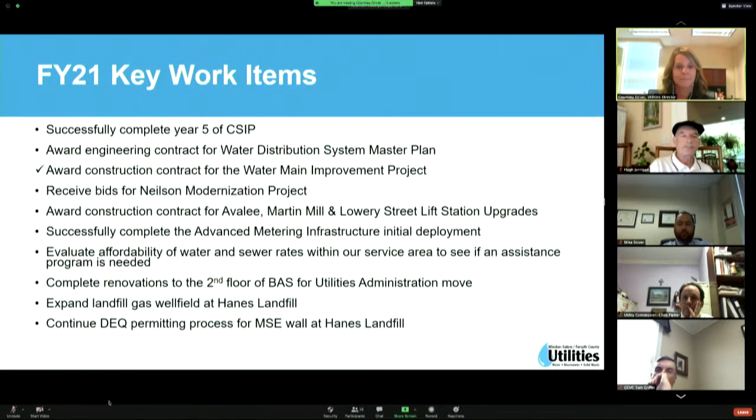With that, I am going to turn it over to Kenny. Kenny's our field operations manager, and he will go over an overview of what he does.

Good afternoon, commission members and utility staff. Utilities field operations is located at 1550 South Martin Luther King Drive. The division consists of 5 work groups: water distribution, meter services, wastewater collection and system compliance, construction services, and technical services.

This picture was taken about a year ago, maybe 14 months ago. We had an 8-inch cast iron water main that broke on Walltown. Our GIS records show this was installed around the year 1927. So this is cast iron pipe. Life expectancy in a good working system is around 80 to 100 years. So we were right around the 92 or 93 year mark.

That's pretty good. It's common to find these types of failures in our pipes just because of system age, and sometimes we impact ourselves by turning pumps on fast or shutting hydrants fast, which can weaken a pipe. But we feel really good that 90-some years out of a water main is a long time, and we can't get our own bodies to last that long. So felt pretty good about that.

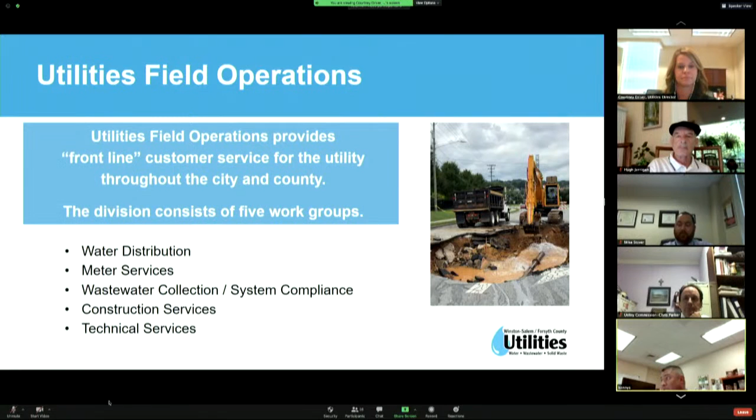The main thing to tell you is around 1955, ductile iron pipe was introduced, so somewhere along those lines we started switching over. We still have a lot of cast iron in the ground, but as a utility we're trying to get the most for our money. The next 2 slides, you'll see two main breaks. The first one is at Highway 52.

It's a 6-inch cast iron pipe. The second slide you'll see is an 8-inch ductile iron pipe that broke. Both of these broke the same week. It was a stretch of cold weather in 2015.

I was currently working at the water plant, and we had anywhere from 4.5 to almost 8 inches of ice on top of our sed basins. That's a rarity because water's always moving, but we had frozen water. The ice was really thick. We had to go out there and punch holes in it so the sludge scrapers could continue to work.

Both these pipes broke because they were underneath the bridge, aerial lines. The water usage was really low, right? It's 4 degrees, no one's washing the car, nobody's watering the lawn. We actually shut down 2 of the large arteries in Winston-Salem. So if you play those videos, you can see.

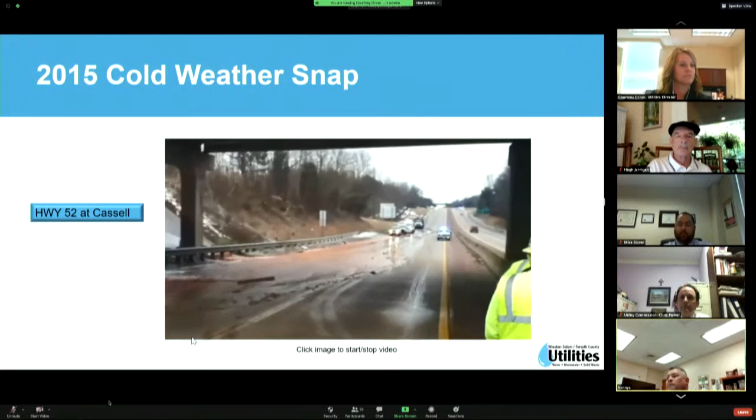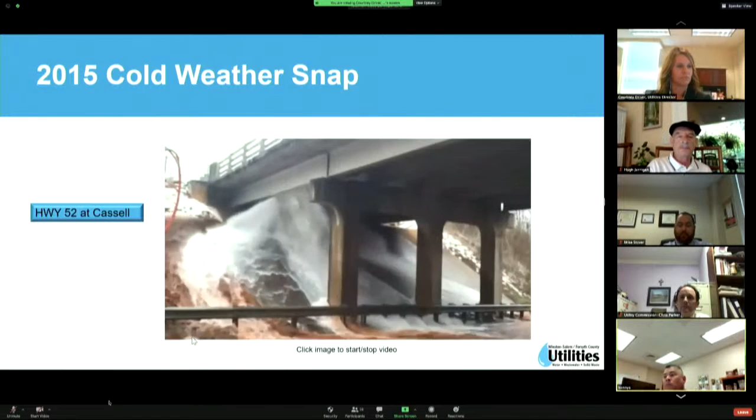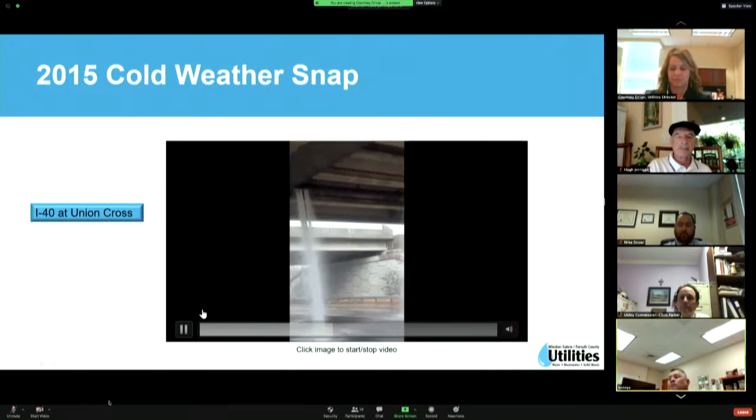The hard part about that was a lot of the roads were still icy. We were creating ice. We tried to get out there and close the water valves as quickly as possible. We did end up losing quite an amount of water, but thank goodness we were able to respond in a safe manner and get those lanes opened back up.

Our water distribution maintains about 2,324 miles of infrastructure. If you think about that from end to end, like I-40 which starts in Wilmington and ends in Barstow, California, that length is 2,560 miles. So if you stacked our water main end to end, you'd make it all the way to Needles, California. That's pretty neat to see how much infrastructure we maintain. This includes pipes, valves, water connections, and about 20,000 water hydrants or fire hydrants.

It's a lot of hydrants out there. That's probably the main thing you see from water distribution. The field operations group, we're kind of like the DOT of your water and sewer. We take care of pretty much everything you can't see with regards to hydrants. Those are pretty common to see.

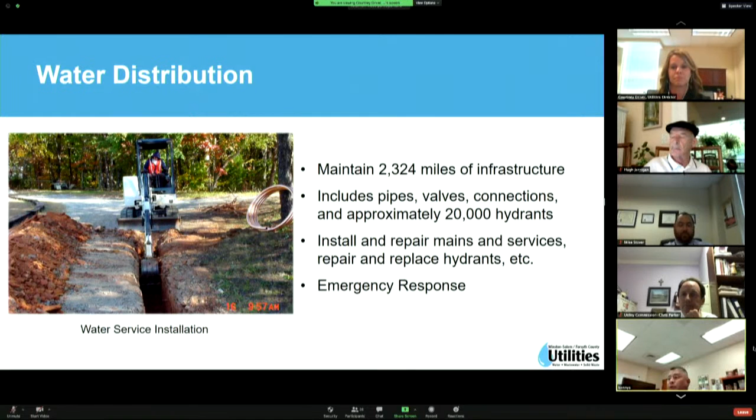We have 2 shifts, starting at 7:30, and the second shift ends at midnight. We do handle emergency response after hours. We have a duty crew responsible for handling any calls that come in from midnight to 7:30. So we do provide 24-hour emergency response.

Meter services is also housed up here. They're responsible for starting and stopping water services. They read approximately 130,000 residential, commercial, and industrial meters. Maintenance includes replacing and repairing meters ranging from 3/4 inch in size up to 10 inches. They also perform leak and usage investigations.

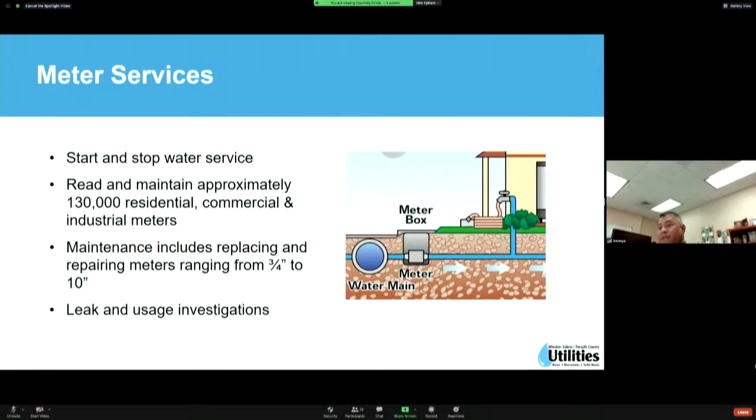Unfortunately, COVID has made a lot of people work from home, and we've noticed a large uptick in calls with customers complaining about their water bill being too high—they're not used to seeing water bills as high as they are because everyone's at home. So the meter services group spends a lot of time investigating high water usage, and most of the time it's just because people are at home and not used to seeing water consumption as high as they have. Our wastewater collection group maintains over 1,800 miles of infrastructure.

So combined with our water mains and our sewer mains, if you got on I-40 and started in Wilmington, drove out to Barstow, California, turned around and came back all the way to Little Rock, Arkansas—that's how much pipe we have to maintain. So that's quite a bit for us to look after.

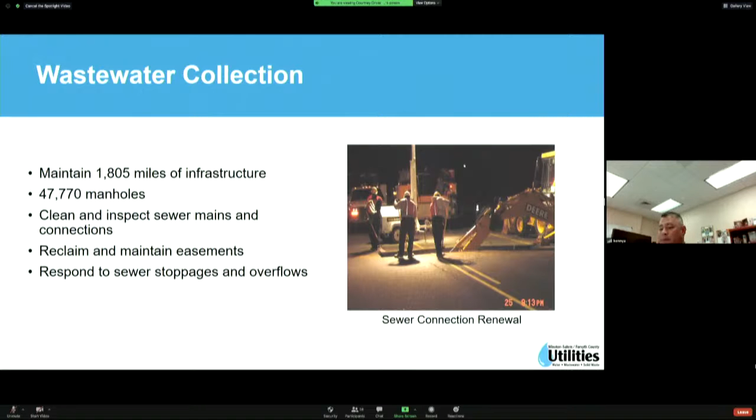The wastewater collection group also cleans and inspects sewer mains and connections. We reclaim and maintain easements. One of the biggest things we do is respond to sewer stoppages and overflows. Last year we had the lowest amount of SSOs at 74—that's the lowest since we've been tracking that. So that was a big win for us.

Gail Kettler, in coordination with Industrial Waste Control and Utilities Field Operations, put out—we launched a large campaign for no wipes in the pipes. We've also seen a large uptick in wipes in the pipes because of COVID, mainly because there was no toilet paper to be found on the shelves, so people were using these so-called flushable wipes.

Flushable wipes, if you read the package, say they're great to use—okay to use on a well-maintained system. Well, not everybody's system is well-maintained, and they'll say they're biodegradable. Well, it may be in 100 years. It doesn't take that long for a wipe to get from your house to the sewer plant, so someone's going to have to deal with those wipes—either this group or the wastewater plants. They either have to get them out by mechanically screening, but the biggest thing is there's a place for everything. A place for those wipes is in the waste basket.

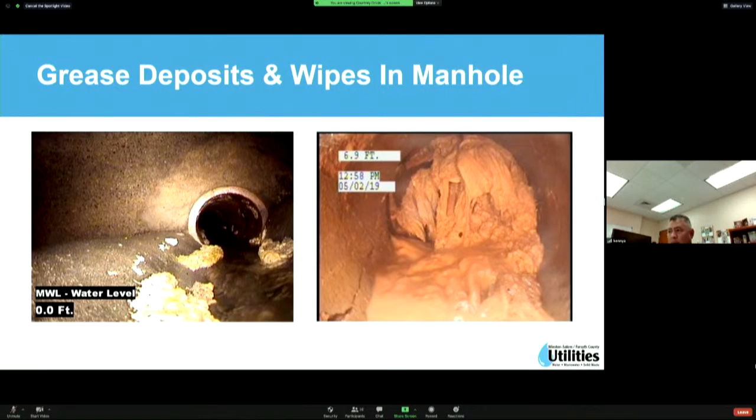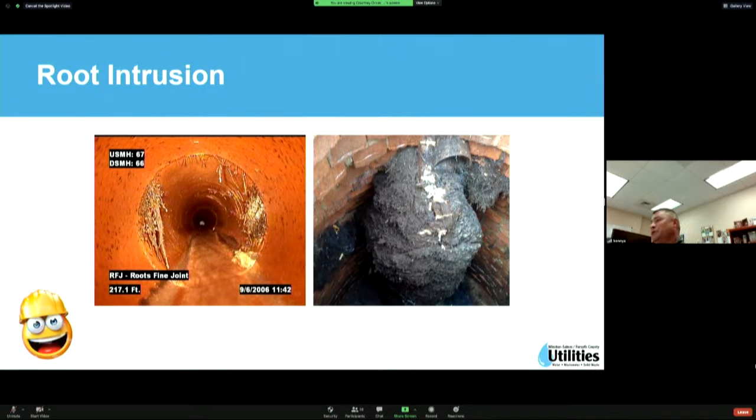So, like I said, we've got to use stick hooks and grabbers and ropes, attach them to come-alongs and hoist to remove those.

The cross-connection control falls under our distribution group. This is one of the new groups that started last fiscal year, and it's really to comply with North Carolina state statute. We have to govern and ensure that our water system, your public water supply, is safe to drink.

Kenny, Harold Day here. I talked to Courtney a couple weeks ago about KRG, our subcontractor. Do they have a permit for their trucks? Our contractors that work for us have to abide by the same rules as anyone else. Our own jet trucks that contain water are in compliance with this new rule. We had to make some modifications, but it's only fair that we do what we're telling the public to do. My question: I was watching one fill up, didn't have a meter on its hose. I guess they do a flat permit fee since they're working for us. That's correct, they pay a fee.

Where will you see the placard? Courtney, if you go back 2 slides, you'll see on the truck that blue placard. It'll say 20 on it for 2020, and in October that's when the placard was good for.

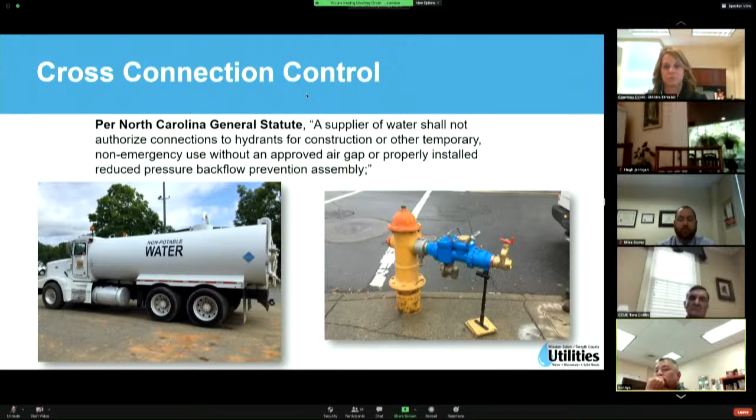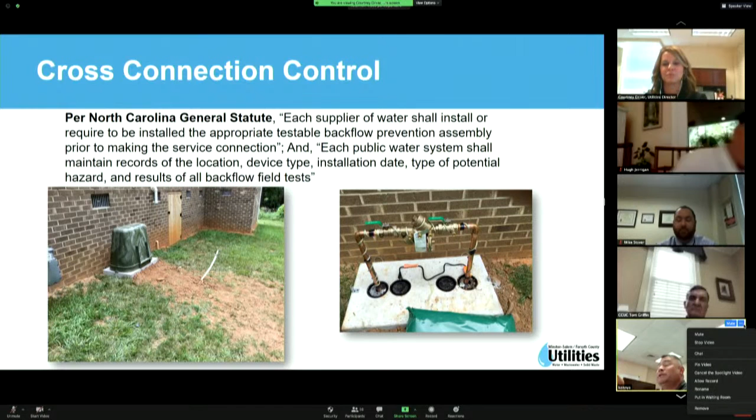We're probably the most visible group out there, probably one of the largest groups in utilities, probably the largest group in utilities. We're probably the most fun group to be around, the most exciting. When we pull up, usually we're in large trucks, something loud, something's going on. We get a lot of attention from children. I'm a child myself, I like the big equipment, but we have a big focus on losing the old image of what people call a city employee, and we're trying to change that face every day. We are the most visible, so we take the good and bad. Sometimes that draws negative attention, but we do our best.

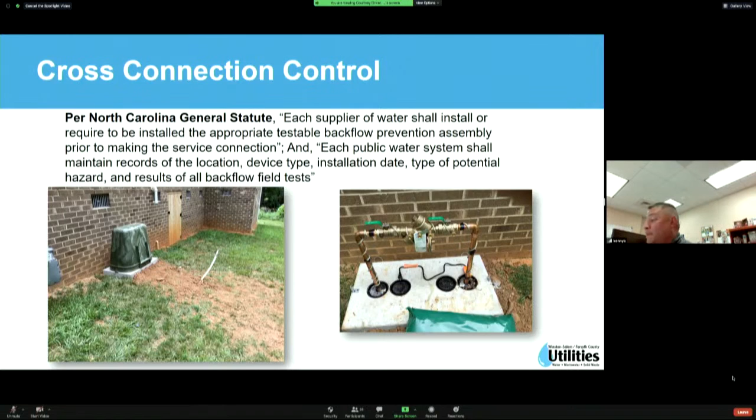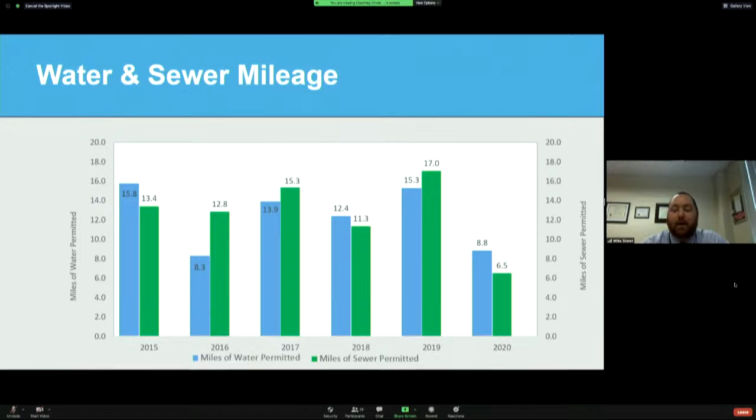So far this calendar year, our plan review team has issued 36 conveyance permits, totaling $3.424 million. This next slide shows the breakdown between water and sewer mileage. So far this calendar year, we've permitted 8.8 miles of water mains and 6.5 miles of sewer mains.

Here's our water production slide. This may look a little worse than it really is. We had very little rain in September 2019, and had an exceptional month, 42.2 MGD, million gallons per day. This month, a year later, we had a subpar month. We don't know if that's because of above average rain or a COVID impact, but we had a 5.8 million gallon per day decrease from this time last year.

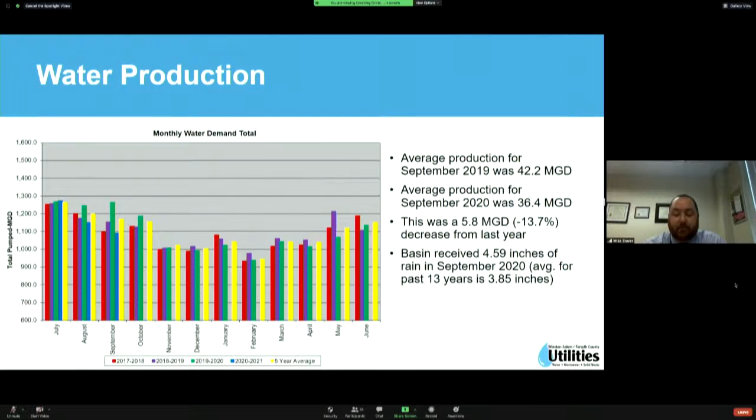Here's our fiscal year to date water production numbers. As I mentioned, last year was exceptional, and I think it bumped up the 5-year average, which we're below right now, but we're slightly below 2017, 2018, and 2019.

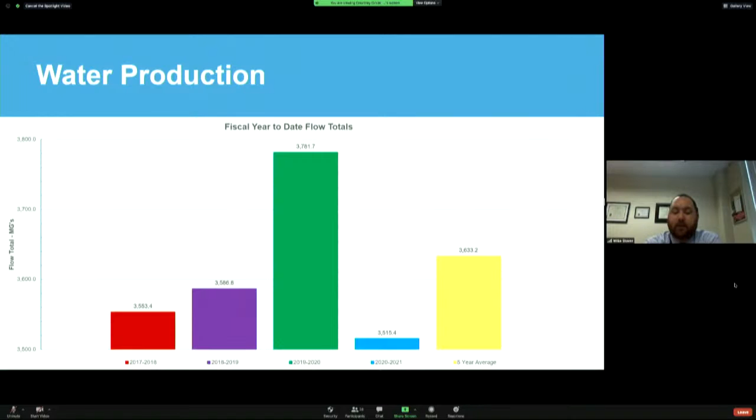Collection system update: we have not received reports from July, August, September, or October. We did receive the report for June. We had 3 notices of deficiencies, which is kind of like your outside of no further action, the lowest action the state gives you. We had 1 notice of violation and 0 intend-to-enforce SSOs.

Here's our SSO rate per 100 miles. We're still doing very well. Last year, as Kenny mentioned, we had a record year. Through the first 3 months of 2020, we were below where we were last year, so we're on pace to have an even better year. Over the winter is usually very tough, we have an uptick in SSOs. If we can get that number down, we'll do very well. Our goal this year: Kenny mentioned we had 74 SSOs last year, our internal goal this year is 65.

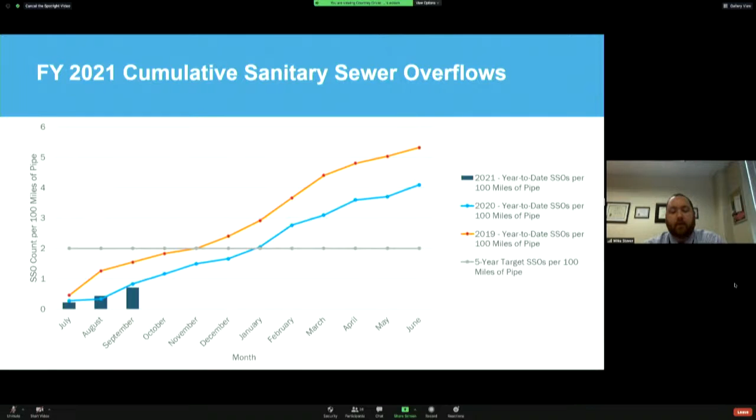Here's our SSOs by aggregated cause. We had 1 categorized as other, due to a private utility contractor who had a shallow sewer main with a trackhoe on top of it and crushed it while relocating that main, creating a sewer spill. We had 3 pipe failures and 1 related to fog, roots, and debris.

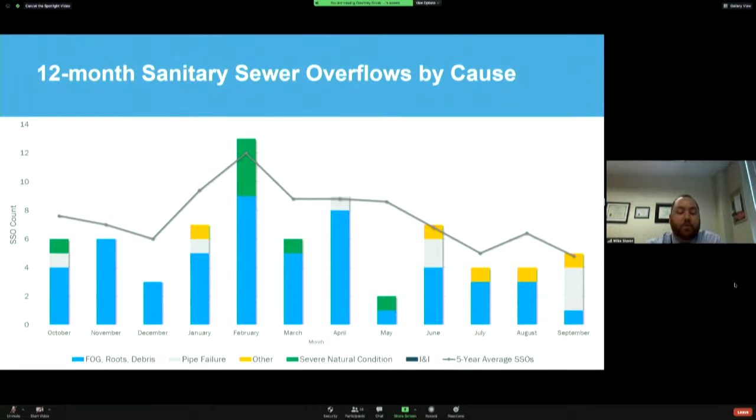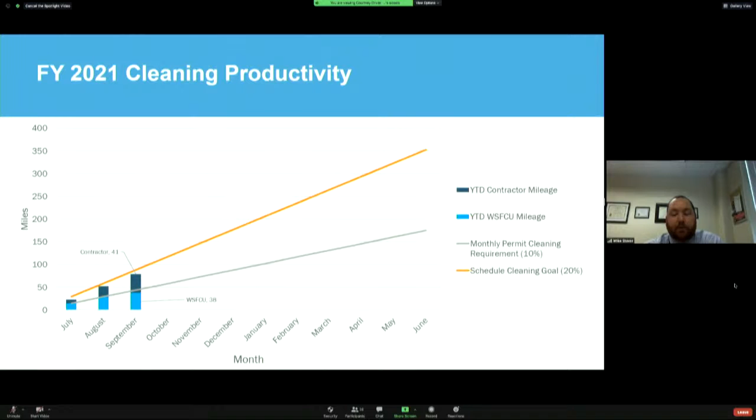Cleaning productivity: we're still well above our 10% permit requirement, slightly below our 20% scheduled cleaning goal. As I mentioned last month, we're still early in the fiscal year, and our cleaning contractors are getting into their groove. We've had some internal staffing challenges. I talked to Kenny this morning, and we've got 3 of our sewer group members leaving our department for other places, so we'll have vacancies to fill, which might hurt us in the interim.

Any questions on the water and sewer updates?

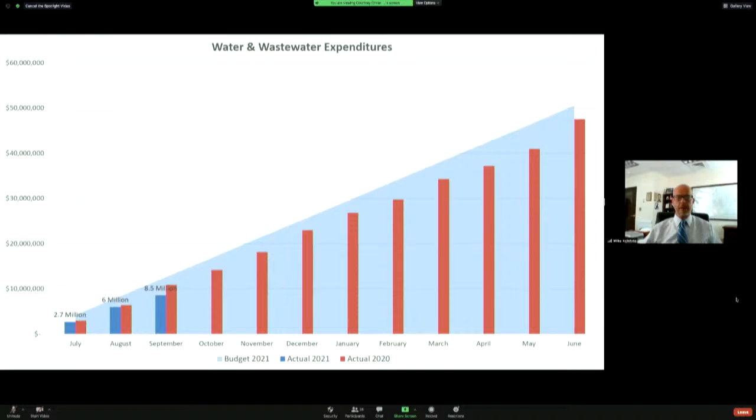On the expenditure side, the actual expenditures for the first 3 months of FY21 are slightly lower than FY20 and under the budgeted amount. So we're tracking well on both the revenue and expenditure side for the FY21 budget.

Let's move on to the revenue impacts of COVID-19. From April 1st through September 30th, we're looking at about 6 months of impact now. We've waived $2.1 million in late fees and penalties, $1.1 million of that in the current fiscal year. Just as a reminder, we did not budget to collect any late fees or penalties in the current fiscal year.

We also currently have nearly 16,000 past due accounts and a total of almost $4.5 million in past due billings, compared to just under $2 million in past due billings at the same time last year. The past due billing amount increased $900,000 from August. Our delinquency rate at the end of September was at 30% compared to 10% at this time last year.

So what we're seeing here is that these numbers are trending higher, which is, I think, to be expected. We're hopeful that our outreach to customers with delinquent accounts will reverse this trend, and we'll be closely monitoring this moving forward. Any questions on that update?

If not, I'll turn it over to Lisa Saunders for an update on the FY20 year-end financial numbers.

Okay, thank you, Courtney. Appreciate that. At Hanes Mill Road Landfill in the first quarter of the fiscal year, we took in 69,855 tons. So we're ahead of the budget by a couple thousand tons and behind where we were last year. And in the month of September, we took in 22,843 tons. So we bounced back a little bit from the low we had in August.

But I should point out that our large commercial customers are decreased. When we look at what they brought us in the first quarter, they are decreased compared to the same period last year. And the construction and demolition waste stream is also decreased compared to last year and also tracking below the budget.

We've taken in 10,152 tons at Old Salisbury Road landfill. So we're a little bit under the budget and significantly under where we were last year. We should note that last year was a really strong year for us. So it's not too surprising that we're under where we were last year, but we're going to have to monitor that closely this year.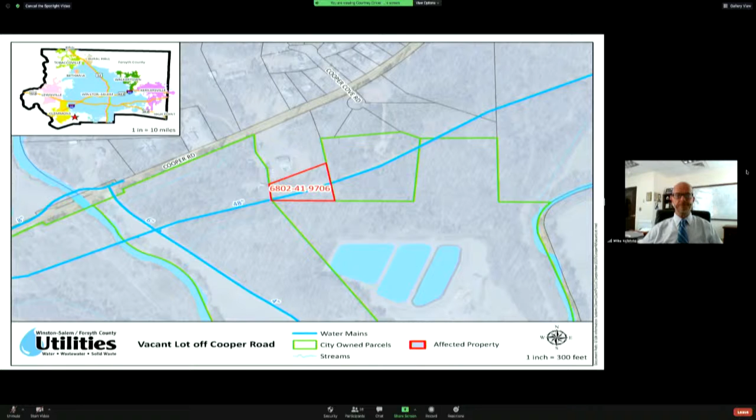Staff recommends approval. Mike, this is Chris. I've got a question. Maybe you can explain the category - it says staff availability for the backflow specialist, and it gave them a 0 as a grade.

Yes, Jerry or Mike Stover, do you want to touch on that? Do you want to tackle it, or do you want me to? Well, I'd love for you to while I'm searching for my document.

Mr. Parker, I believe it's the way the RFP was written. I can't remember exactly what the criteria was, but for staff availability, I believe if you had less than 50% availability, you got a 0. So it's not that they're not available to do the work, they just fell below that 50% threshold, I believe that's correct.

Jerry can confirm. That's correct, Mike. This is Jakira - if the firms had 50% or less, then they would receive a 0.

So you're saying that they would get a 0, but they still have enough available staff? Correct. They're also the incumbent. They've been doing this work for us for several years now, and we're confident that they can accomplish the work successfully.

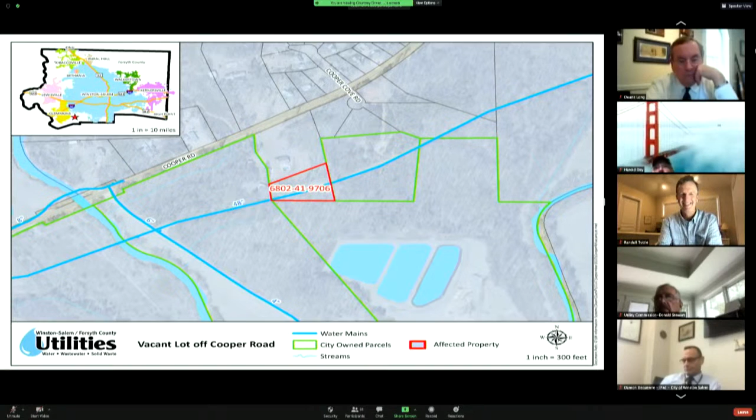Any other questions?

Okay, we'll move on to item 5, which is consideration of a resolution awarding a purchase order for ferric chloride. Bids were received on June 26, 2020 for ferric chloride for use at the wastewater treatment plants. 2 bids were received, with PBS Chemicals, Inc. the low bidder at $138,000. Based on the bid amount, there will be an 8.15%, or $10,400, increase annually in the cost of ferric chloride. Terms of the bid allow for the contract to be extended for 2 additional years, making the total potential award $414,000 for 3 years. Staff recommends approval.

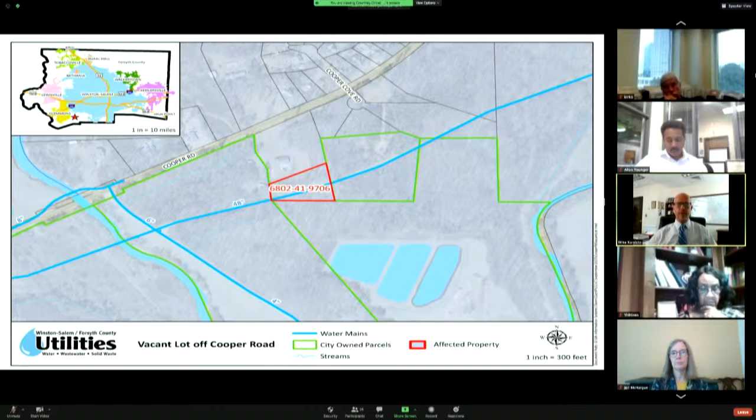Item 6 is consideration of a resolution awarding a contract for the sewer replacements and stream stabilization project. This project includes the replacement of approximately 1,100 linear feet of existing sanitary sewer stream crossings at 9 different site locations, clearing of easements and access points, including tree removal, bypass pumping, riprap, and site restoration. 6 bids were received, with North State Environmental, Inc. the low bidder, at

$708,532. North State Environmental agreed to the subcontract goals established for this project of 7% minority and 7% women-owned businesses. It is recommended that a contract for this project be awarded to North State Environmental, Inc. in the total bid amount of $708,532, and that $35,000 be available for contingency if needed. The engineer's estimate for this project was $985,051.

This is Charles Wilson with a quick question. I don't want to look a gift horse in the mouth, but North State's bid was so dramatically lower than even the engineer's estimate. It just makes me wonder why. It's just curiously lower than all the rest.

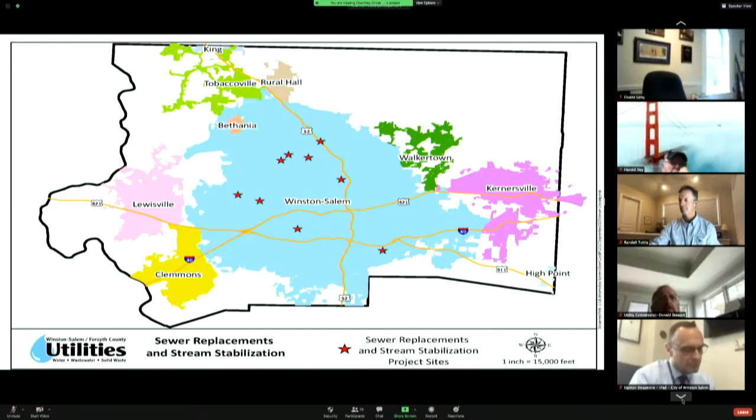Jerry, do you want to touch on that? I can touch on that. As you may recall, we've made attempts to bid this project several times over the last 2 years, 4 times actually, and in each case bids were substantially over the nearly $1 million estimate. If this bid had come from someone we didn't have familiarity with, it would cause concern or cause us to question their ability to know what they were doing, but they're a very viable contractor. They've studied this project for most of 2 years on how to achieve, how to submit a cost that might be more appropriate to our budget. And it's evident with the construction climate we're now in, they were willing to make every effort to come in at an attractive bid. I think there's no doubt that over the last 2 years and the number of bids, they were somewhat familiar with what we viewed as the estimated cost for this project, and they didn't want to lose it. They're a very viable provider. They've done this type of work in the past for the commission and do a great job.

I just didn't know if in the breakdown of their bid there was an itemized breakdown where it showed here's where we're realizing $250,000 of savings versus your estimate.

Jerry, do you have that? I don't. I have the bid tabulation, but there's 21 different line items on it, so it'd take me some doing to find something that might jump out at me that surprises me. But it just piqued my curiosity a little bit that it was so much lower and was the only one so much lower. But as you say, you're confident that they're a good contractor and all that.

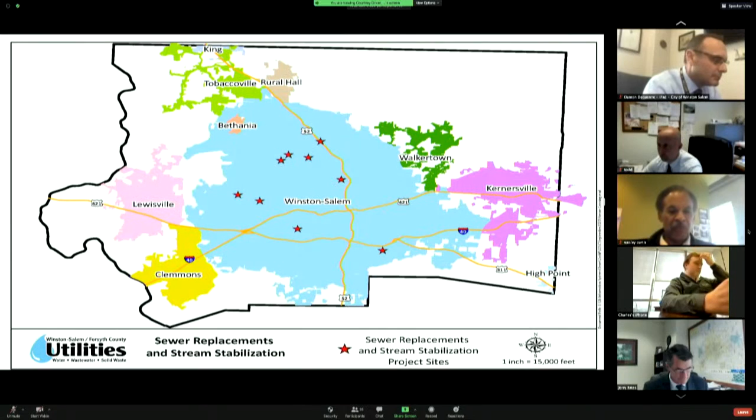Yes, very confident. Commissioner Wilson, I'm really glad that you mentioned that, because as Jerry mentioned, this would be the fourth time we've bid it. Previously all the prices were above the engineer's estimate and the budget. So we are starting to see some more competitive prices. I think that's a good sign as far as our projects going forward.

Okay, and if I could say one last thing about this project: 2 years ago, our estimate truly was closer to $750,000, but because we continued to get bids in substantially higher, we reviewed the project scope and actually increased it slightly to try to keep up with what we felt the market might be doing. As a result, it ended up coming back to where we thought it should have been in the beginning, or more close to what we felt it should have been. Mike Stover, would you find that to be correct?

I would also add that North State Environmental is a local contractor. I believe they're a WBE, correct me if I'm wrong, Jerry, and we've done multiple stream bank projects with them in the past, and they've all been very successful.

What types of projects have we done with them? Almost the exact same work. We did a Muddy Creek sewer line stabilization project where there was a clump of trees in Clemmons off the Muddy Creek interceptor that fell off into the creek. The stream bank cut around the stumps, and we had a 54-inch sewer line in jeopardy of failing. They came in, removed the debris out of the creek, and built the stream bank back, very similar to what we're asking to do here, except we have smaller sites, just more of them.

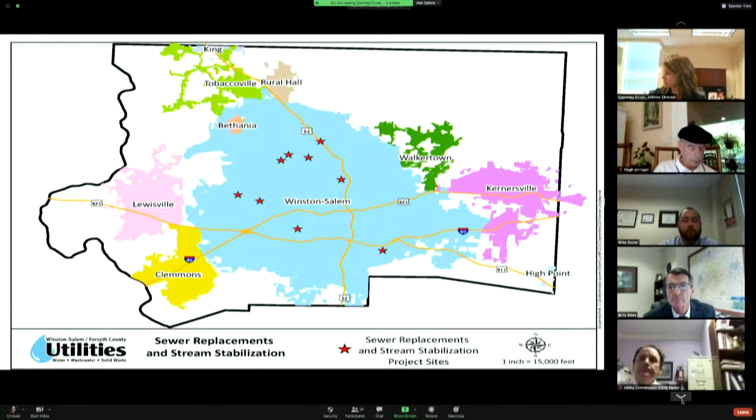And they respond pretty well, they stay on the project, they don't delay things? Absolutely. These stream bank projects actually go very quickly, to be honest with you. Okay. Okay.

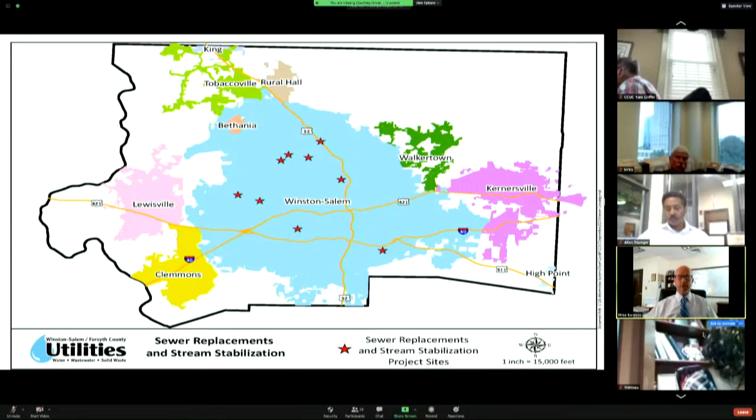Moving on to item 7, consideration of a resolution authorizing the execution of an engineering agreement with Hazen and Sawyer PC for the water tank maintenance program. The existing program ended in August, and staff issued a request for qualifications to find a new vendor. 4 responses were received, with the selection panel of city staff recommending Hazen and Sawyer for the work. Staff negotiated a fee of $267,900 for 5 years of services, and Hazen and Sawyer's submittal included 35% MWBE participation. Staff recommends approval of an agreement with Hazen and Sawyer for a 5-year water tank maintenance program in the amount of $267,900.

Item 8 is consideration of a resolution awarding a purchase order to Andritz Separation Inc. for repairs at the biosolids drying facility. This item requests a purchase order to rebuild the drum and furnace at the Elledge Wastewater Treatment Plant dryer facility due to normal wear and tear on the components. Andritz Separation Inc. is the manufacturer and provides parts and service work for the drum drying system at the Elledge plant. Andritz has provided a quote of $367,700 to provide the needed maintenance on the unit. Staff is requesting approval to issue a purchase order for the specialty services directly from Andritz as a sole source vendor for the preventive maintenance and repairs to the dryer system, in the amount of $367,700, to maintain safe and proper operation of the drum drying equipment at the Elledge Wastewater Treatment Plant.

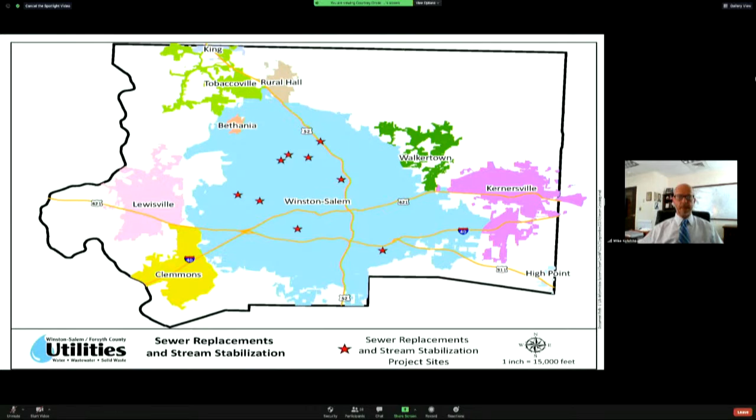Item 9 is consideration of a resolution approving a purchase order to Atlas SSI as a sole source vendor. The Idols Raw Water Pump Station is the primary raw water source for the Neilson and Thomas water treatment plants, and contains 3 raw water pumps with a pumping capacity of 50 million gallons per day each. Large traveling screens that remove debris which could damage the pumps protect these 3 raw water pumps. The existing screens were recently inspected, and excessive wear on 2 of the 3 traveling screen systems was noted, with a recommendation that they be rehabilitated. Atlas SSI is the manufacturer and sole provider of these parts and provided a quote of $42,358 for parts to rebuild the traveling portion of 1 screen assembly. Since only 1 pump and screen can be out of service at a time, additional parts to rebuild the second traveling screen will be procured once the first is back in service. Other components will be evaluated while it is out of service to determine if they need to be refurbished or replaced.

Staff is requesting that a purchase order be awarded to Atlas SSI for $42,358 to cover the cost of the parts to rebuild the traveling portion of the screen showing the most wear. This is Harold Day here. We've got 3 of these machines, identical, so we think we're going to have to do the other 2 soon.

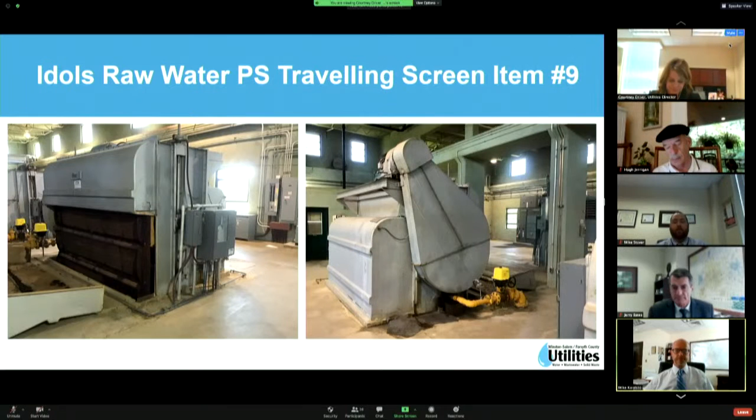Item 10 is consideration of a resolution requesting MWBE goals be set below the 10% minimum goal for the gas extraction well and collection piping installation at Hanes Mill Road landfill. The city's internal MWBE committee met to identify subcontracting opportunities for this project. After reviewing the scope of work, identifying the relative availability of MWBE firms, and discussing the project specifications, it was determined that the subcontracting opportunities are nominal, consisting of a minimal amount of erosion control and clearing, and it is the recommendation of the committee that the MWBE participation goals be set at 4% MBE and 2% WBE.

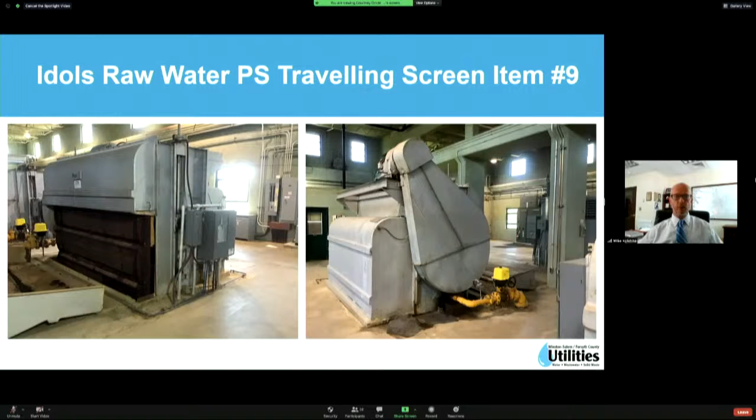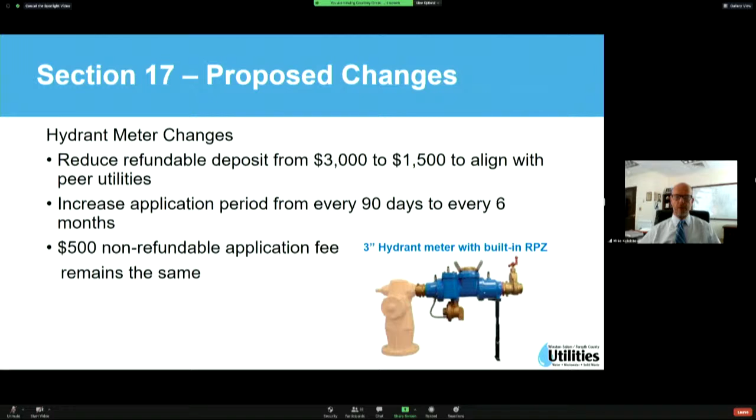If there are no questions, I'll move on to items 11 and 12, which are planning and policy items. Item 11 is consideration of a resolution amending sections 17 and 53 of the water system policy resolutions. This item implements changes recommended by the Planning and Policy Committee in September regarding hydrant meters and tanker permits. The changes to section 17 reduce the hydrant meter deposit from $3,000 to $1,500, lengthen the application period from 90 days to 6 months, and maintain the $500 non-refundable application fee. These changes also extend the tanker permit period from 6 to 12 months, with the current fees remaining the same.

Also of note, the change to section 53 clarifies that backflow devices shall be tested upon installation, replacement, and annually, whereas it currently just states they will be tested at least once per year. Any questions on item 11?

Item 12 is consideration of a resolution amending section 7 of the Water System Policy Resolutions. This item is also to implement changes recommended by the Planning and Policy Committee in September regarding the resale of water, and aligns our policy with the North Carolina Utility Commission requirements. This section covers the approval of a lessor to resell water to a leased premise. It keeps the language that the director shall be notified that a certificate of authority has been issued to the lessor by the North Carolina Utility Commission. It removes the language that the operator of said system shall provide annually a statement of revenue generated by the resale of water.

That's not information that Winston-Salem/Forsyth County Utilities needs. It also removes the language that all meters used by the operator of the system must comply with the American Water Works Association C700 or C701 specifications for potable water meters, and now leaves those required specifications at the North Carolina Utility Commission level. Any questions on item 12?

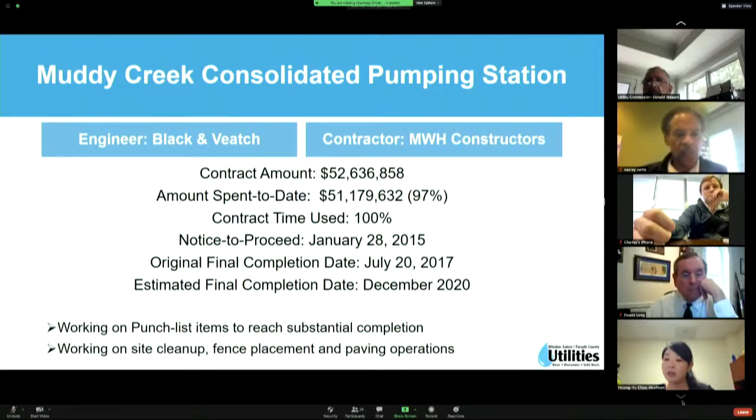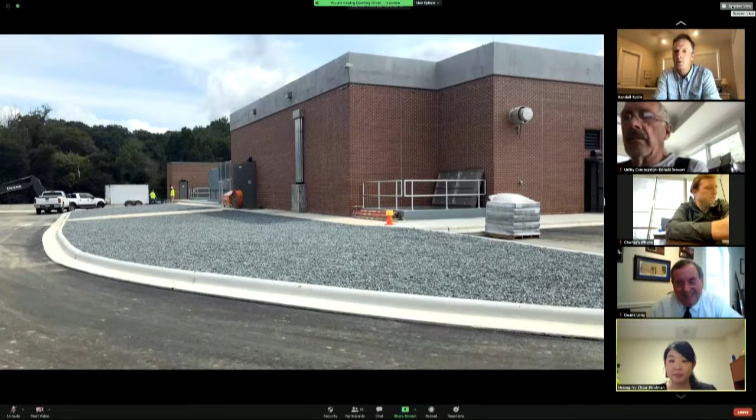For Kerners Mill Lift Station—Hey Shane, before we leave that huge project, can you give us any level of confidence about December 2020 and the status of our ongoing discussions with the contractor? Well, I think we're pretty much on track. They're working on the punch list items to finish in December. Both us and Black and Veatch are pretty comfortable with that. There isn't any big major problems at this point. We'll just leave it at that. Thank you, that's good to hear.

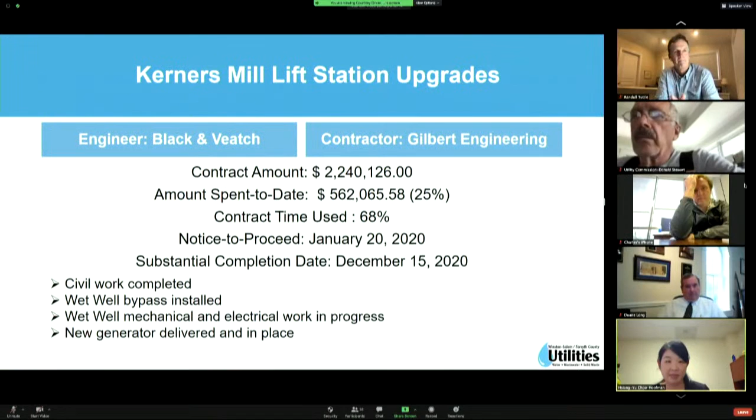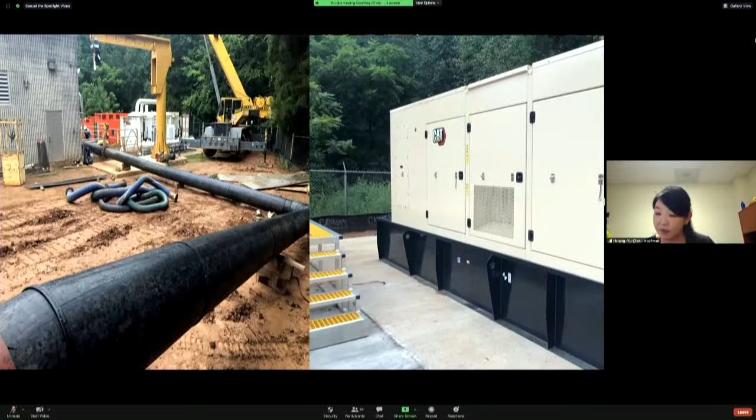Kerners Mill Lift Station: notice to proceed was January of this year. All of the civil work has been completed. They are working on the mechanical and electrical work. The new generator was delivered and is in place now. To the left you can see the wet well bypass, and to the right is the new generator that's been installed.

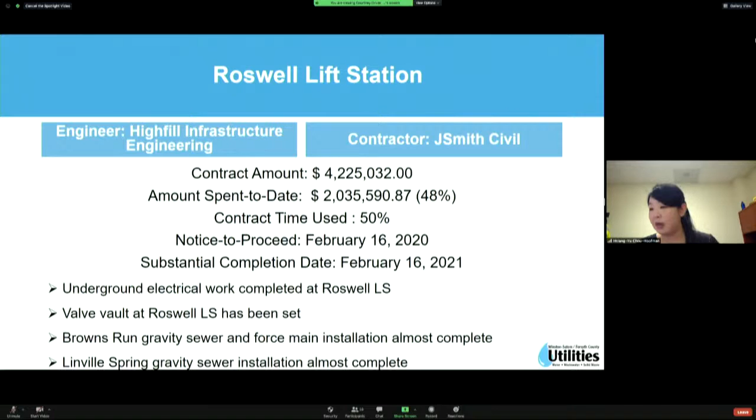Roswell Lift Station: we're at around 50% contract time. All the underground electrical work at the lift station has been completed. The valve vault has been set. The sewer force main at Browns Run Lift Station is almost complete. The gravity sewer at Linville Spring installation is almost complete as well.

Here you can see the progress map. The green is what they've completed so far. The yellow is what they're currently working on this month.

North Mill Creek: the notice to proceed for this project was February of this year. They've cleared the easement and installed the erosion control, but pipe installation is ongoing and they're behind schedule. We've been documenting the issues and working with our engineer to address them.

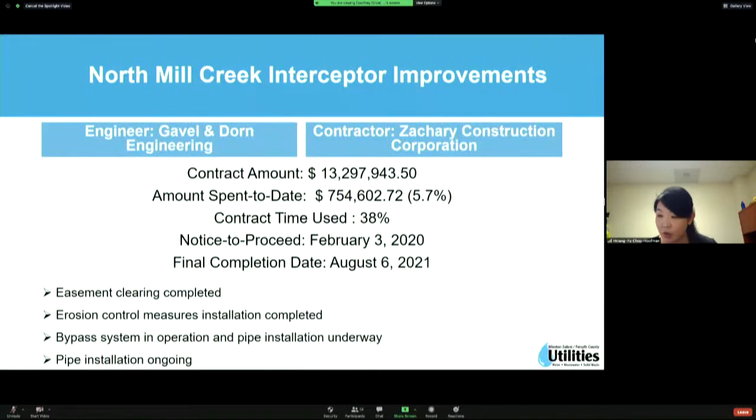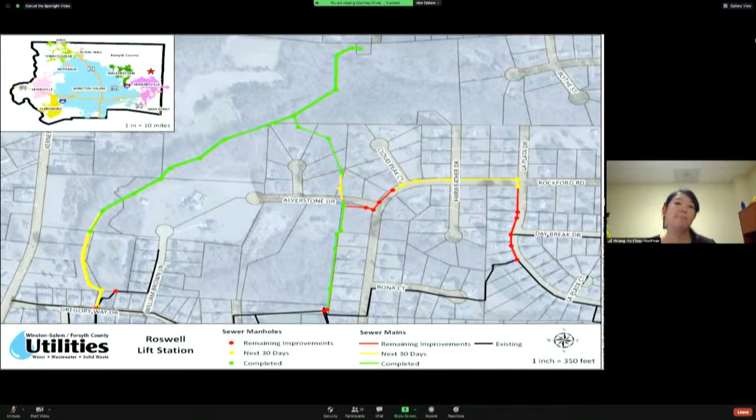This is Commissioner Day—I'd like to go back to that Roswell project. The customer out there that didn't like us, have we had any more conflict with her? We've been in contact with that property owner and we're working through getting the project completed. I think we're good. We're pretty much in front of their property right now, but we shouldn't be there much longer, so we should be able to work through those issues. Well good, I hadn't heard anything from her either. That's good.

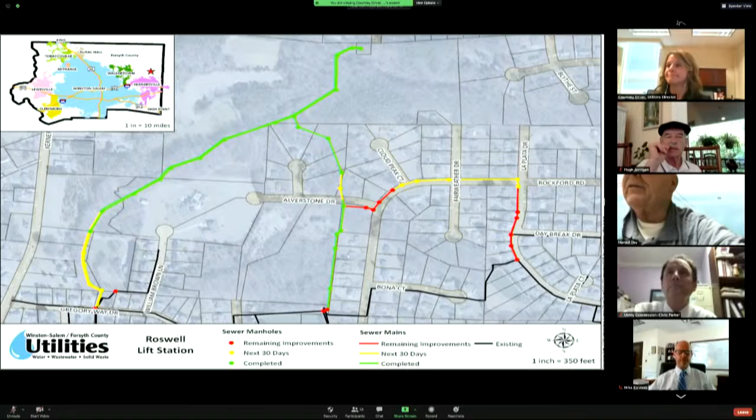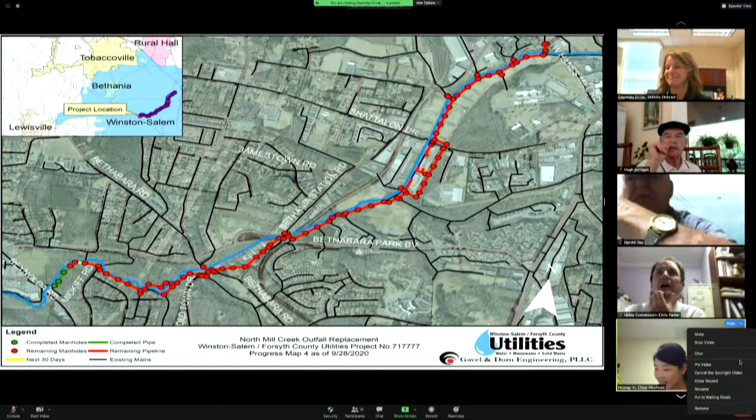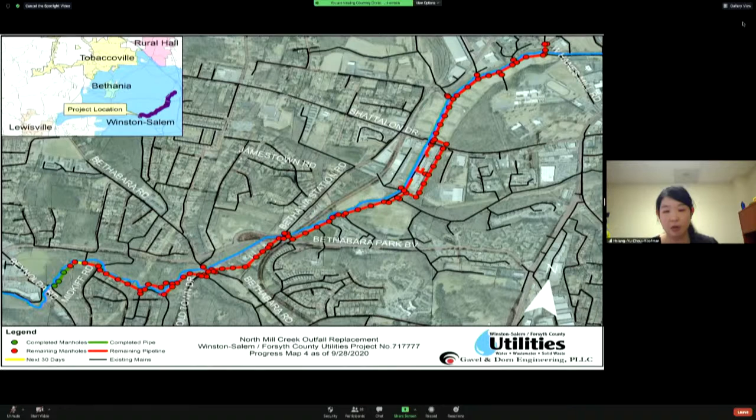I think I was at the progress map, Courtney. Yep, thank you. So here is the progress map. The green to the lower left-hand corner is what they've completed. They still have a whole lot of red that's got a ways to go. That's it, any questions?